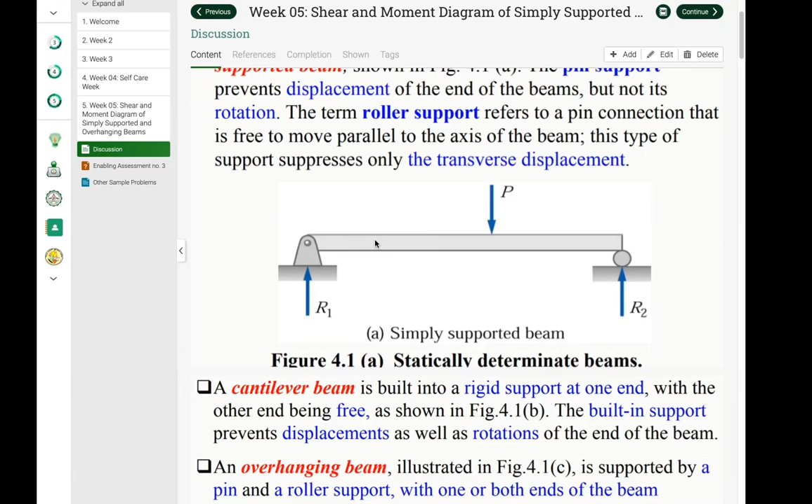The term beam refers to a slender bar that carries transverse loading, meaning the applied forces are perpendicular to the bar. For example, we have a beam that carries a transverse load, which could be a concentrated force or a uniformly distributed load. In a beam, the internal force system consists of a shear force and a bending moment acting on the cross section of the bar.

In mechanics of deformable bodies we discussed the bending stress, which is 6M over bh squared for a rectangular section. We also have the shear stress, do you still remember that from mechanics of deformable bodies? You still need to know this as we will encounter those stresses again. So we have the bending stress, which for a rectangular section is 6M over bh squared. And then for the transverse or horizontal shearing stress, that's tau equals 3V over 2A. Later we will have example problems on this.

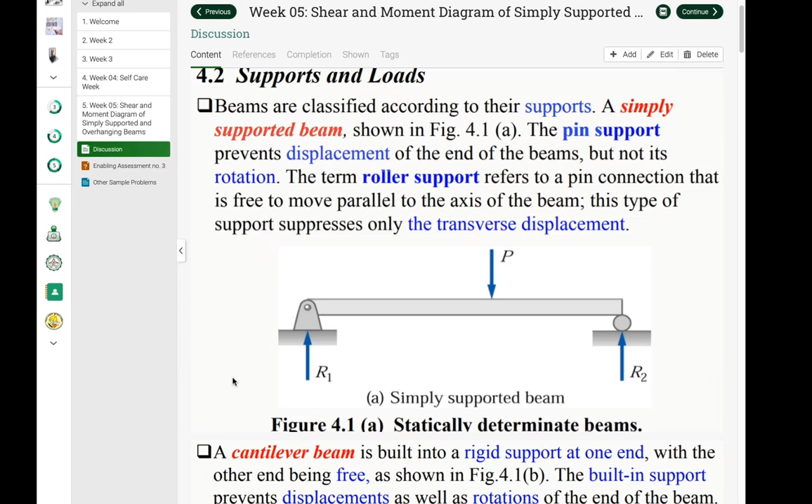Last week we discussed the typical supports and types of loadings we encounter in this subject. The first one is the simply supported beam, which we define as a statically determinate beam, because we could solve its reactions or forces just using equilibrium equations. We also have the cantilever beam and the overhanging beam.

There are three types of beams that are statically determinate: the simply supported beam, the cantilever beam, and the overhanging beam.

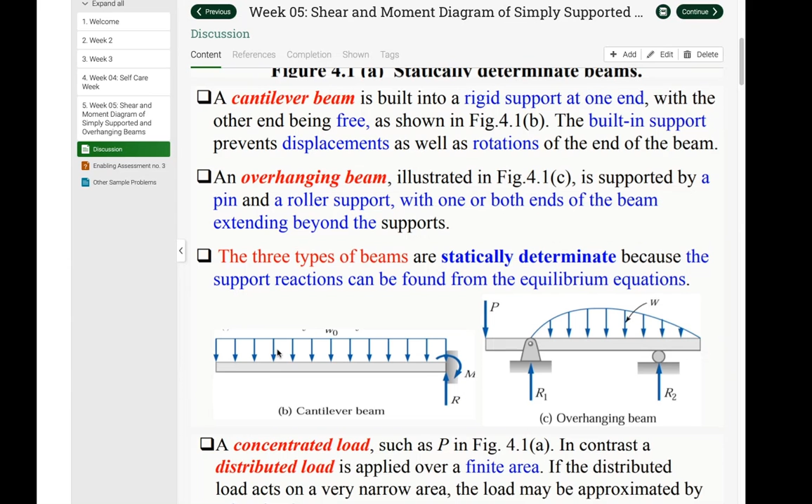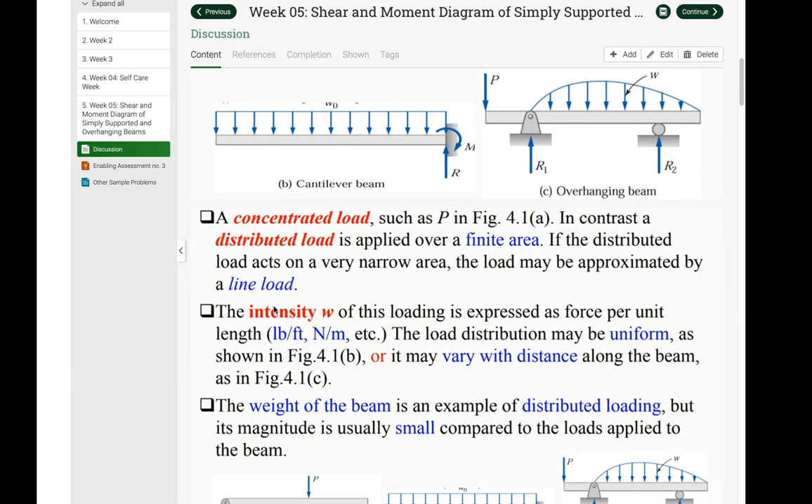We already defined what a concentrated load and a distributed load are. The unit of distributed load could be Newton per meter or kilonewton per meter, where the meter refers to the whole span of the distributed load. This is what we call the intensity W, which could also be pounds per feet, and it may vary with distance along the beam. We also have the weight of the beam, so take note, if the weight of the beam is given, we have to compute it separately, it's not yet included with the distributed loads.

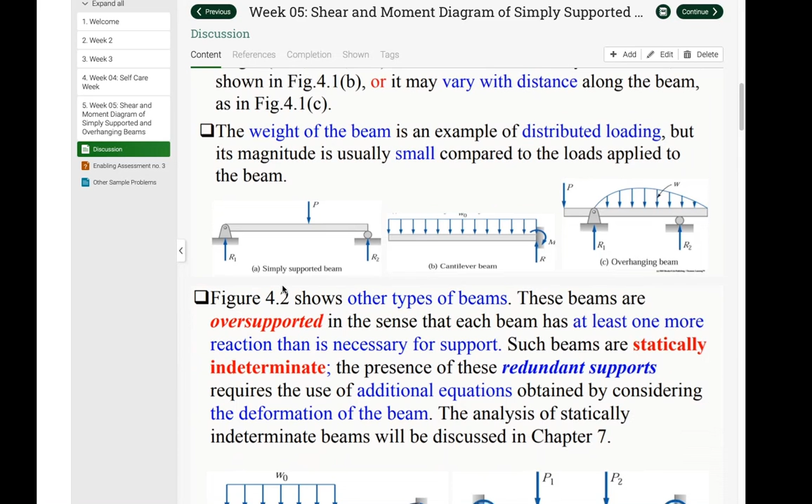We also have the statically indeterminate beams. Usually we define a fixed end and a roller support at the other end as statically indeterminate. And when both ends are fixed, we define it as statically indeterminate as well, such as the propped cantilever beam and the fixed or restrained beam.

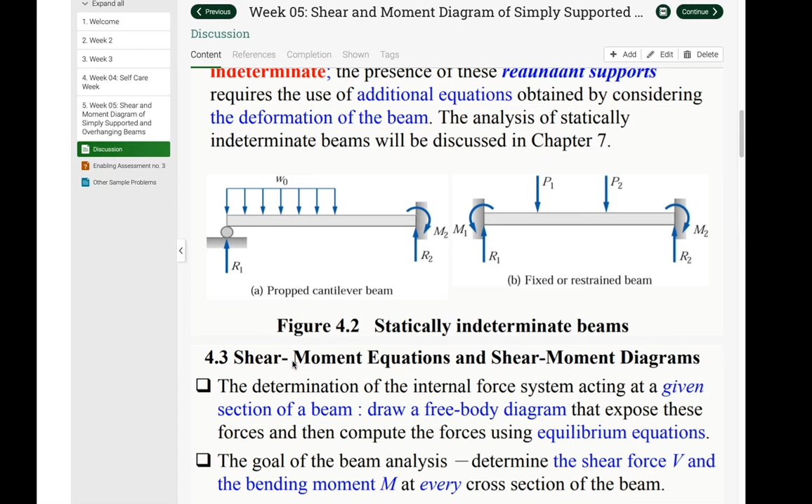In shear and moment equations and shear moment diagrams, we determine the internal force system acting at a given section of a beam, identifying forces like shear and moment. The goal of beam analysis is to determine the shear force and bending moment at every cross-section of the beam. For example, at a certain distance we need to determine the shear force and bending moment, so we should first draw the shear and moment diagram to more quickly get these values.

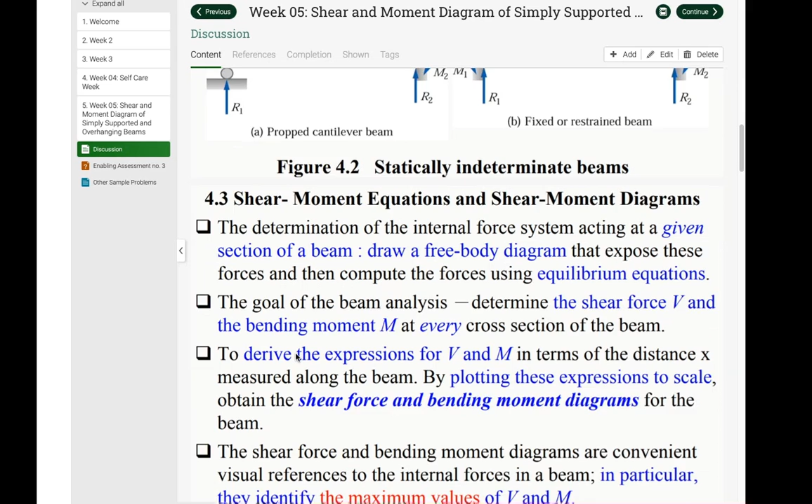We derive the expression for shear and moment in terms of the distance x measured along the beam, then by plotting these expressions to scale, we obtain the shear and moment diagrams for the beam. Later we will have sample problems about shear and moment. The shear force and bending moment diagrams are convenient visual references to the internal forces in a beam, allowing us to identify the maximum values of shear and moment.

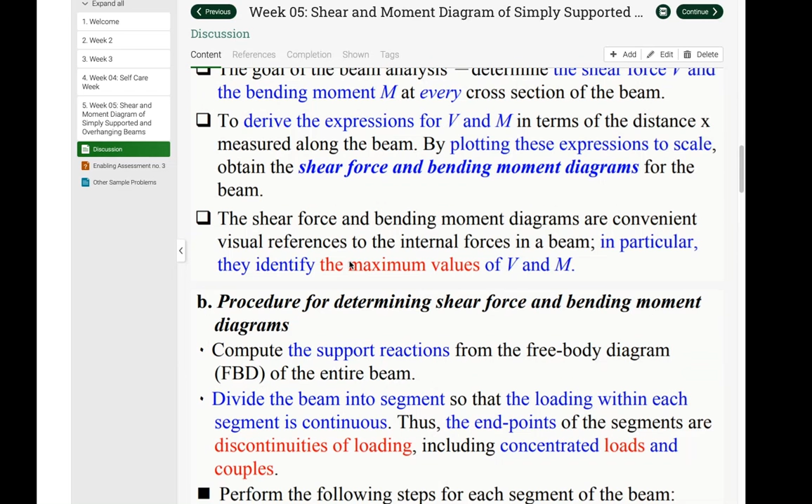Here's the procedure for determining the shear force and bending moment diagrams. First, compute the support reactions from the free body diagram. So basically class, let's start by computing the support reactions. Since it's simply supported, we need to compute the leftmost and rightmost reactions. Then we divide the beam into segments so that the loading within each segment is continuous, with endpoints at points of discontinuous loading, including concentrated loads and couples.

Then perform the following steps for each segment of the beam. Introduce an imaginary cutting plane within the segment, located at distance x from the left end of the beam, that cuts the beam into two parts. So once we cut the section, we separate the left and right sections of our beam. Then we draw our free body diagram for that part of the beam, where we analyze the directions of our shear and moment.

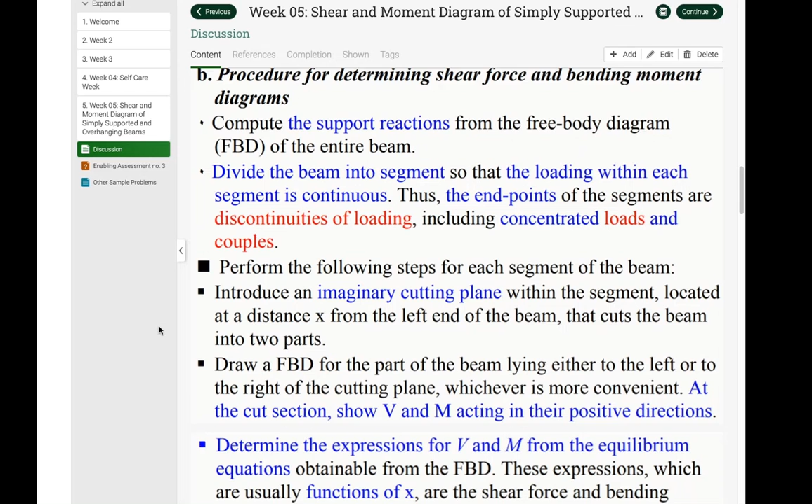At this cut section, show V and M, shear and moment, acting in their positive directions. Class, once we compute the shear and the result is negative, it means we made wrong assumptions. Same with our moments. Then we determine the expressions for shear and moment from the equilibrium equations obtained from the free body diagram. These expressions, which are usually a function of x, are the shear force and bending moment equations.

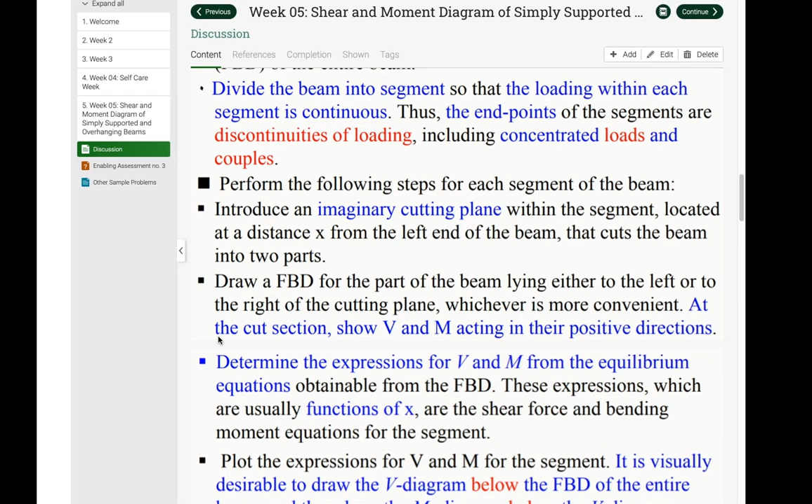Then we plot the expressions for V and M for the segment. We identify our shear diagram from the loadings on the beam. Then we convert our shear diagram into the moment diagram. The bending moment and shear force diagrams of the beam are composites of the V and M diagrams of the segments, so these diagrams are usually discontinuous or have discontinuous slopes at the endpoints of the segments due to discontinuities in load.

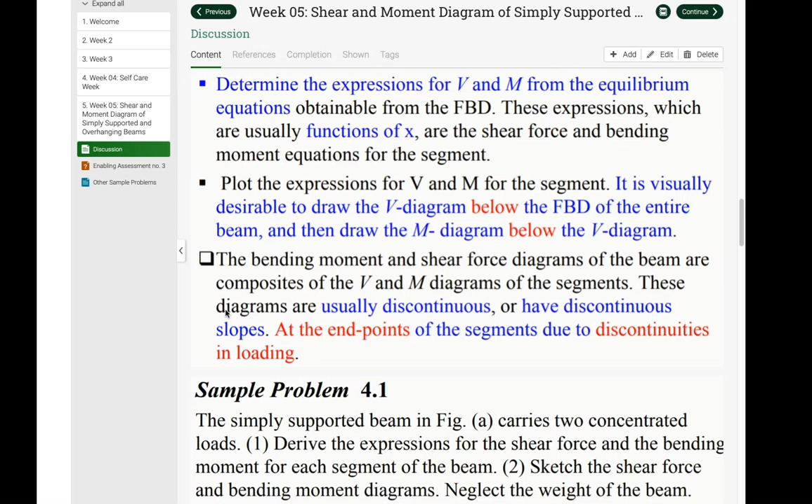So now we'll have an example, sample problem 4.1. We have here a simply supported beam. Can you see this figure? Let's analyze the figure first.

We have a reaction at A and a reaction at B, then we have segments A, B, C, and D. We also have given two concentrated loads in the downward direction, 14 kilonewtons and 28 kilonewtons, with distances of 2 meters, 3 meters, and 2 meters. Let's read our given information first.

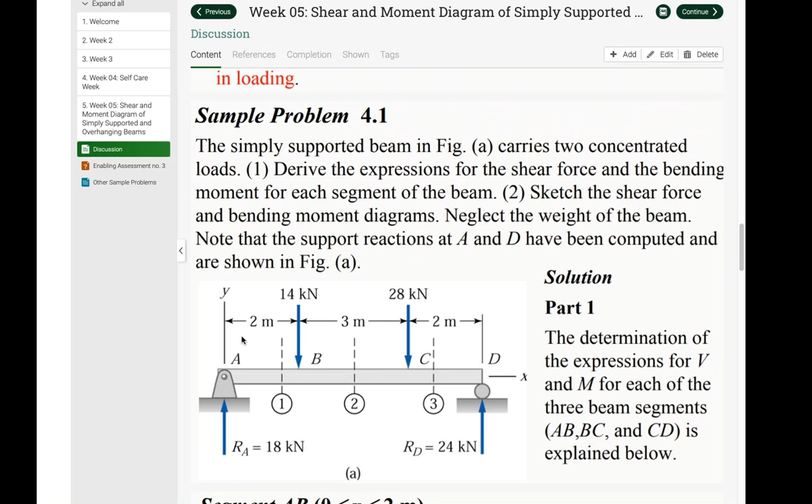Okay, so let's start with sample problem 4.1. The simply supported beam in the figure carries two concentrated loads. First, we derive the expression for the shear force and bending moment for each segment of the beam. Then we sketch the shear force and bending moment diagrams. Note that we're going to neglect the weight of the beam, meaning we're not going to include it.

Sometimes the weight of beams is given in kilograms or pounds, but here since we're told to neglect the weight of the beam, note that the support reactions at A and D have already been computed and are shown in the figure, so we don't need to compute them ourselves. So, solution part 1: the determination of the expressions for V and M for each of the three beam segments. We have segments AB, BC, and CD.

So for segment AB, we determine that 0 is less than x is less than 2 meters. We identify that our x is denoted along the middle of that 2 meter span. So how do we solve for our shear force? By using the summation of forces in y equals 0, where upward is positive and downward is negative.

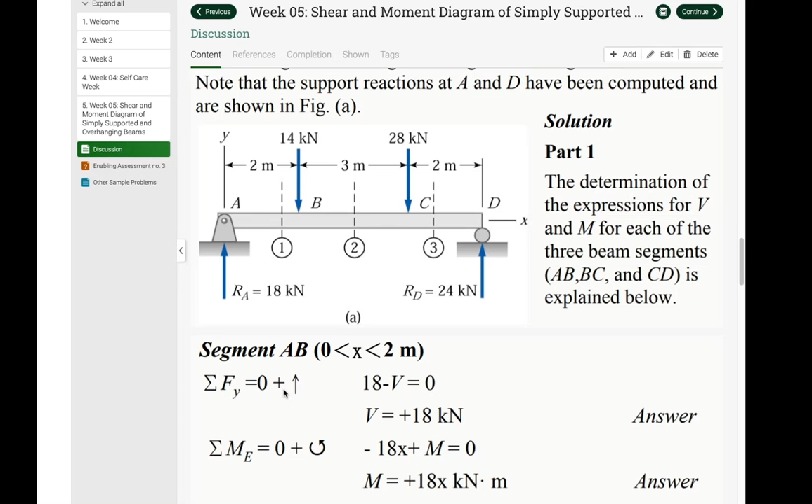Let's look first at the free body diagram we're going to make. For example, let's cut a section in segment AB at a particular x from A to B, so this is our x. Then we're given the reaction force at A, which is 18 kilonewtons upward. So we're going to determine the shear at segment AB.

So we could easily identify our shear direction, which is downward class. So it could remain in equilibrium, no? Kasi meron tayong upward na 18 kilonewton. So by summation of forces, y is equal to 0, we have 18 upward minus our V is equal to 0. That's why we have a shear force of V equals positive 18 kilonewton for this segment E.

Then, of course, syempre, once we cut a section in a beam, kapag hindi naman siya given na pin connected or hinge connected, automatically class magkakaroon ka ng three reactions. But since dito class is simply supported naman siya, at lahat ng mga loads o forces natin is upward and downward lang, wala tayong horizontal forces, then we neglect na yung ating horizontal force kasi mag-equal to 0.

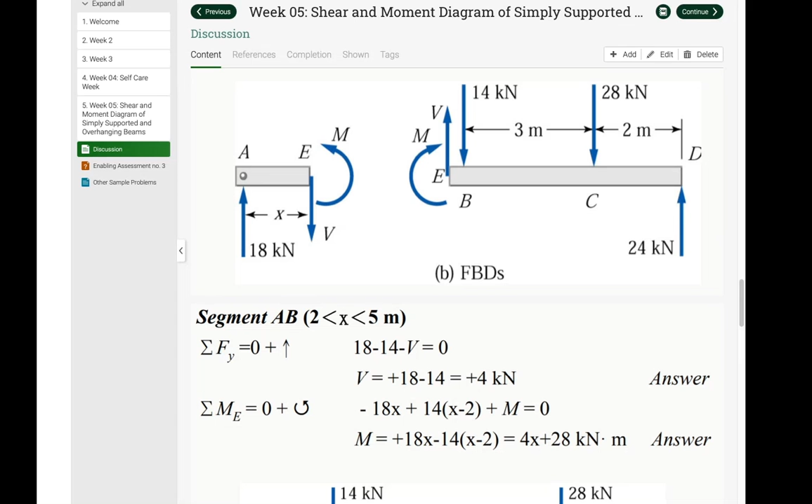Ayan, so nasundan class? So we will now proceed sa next na segment natin, which is segment BC, which is 2 meters is less than X and less than 5 meters, yung gitnang part.

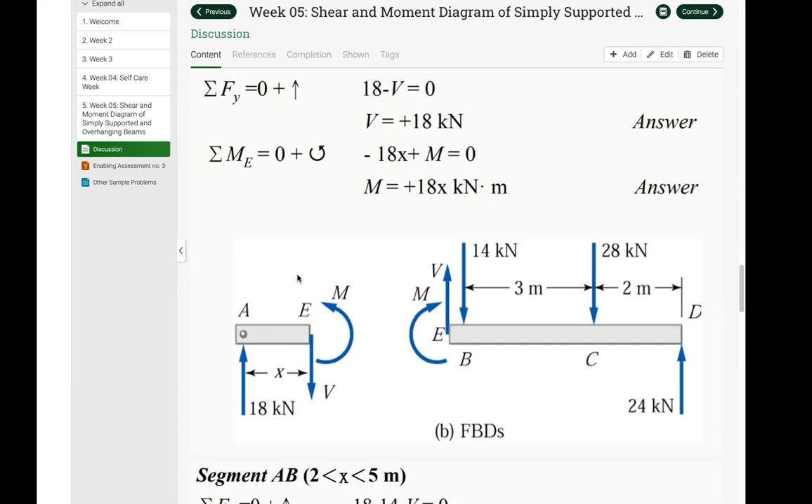So from our free body diagram, plus... ayun, ito. So ito yung ating X, and then ito yung ating 2 meters. That's why we have X minus 2. So ito yung hinahanap natin, X minus...

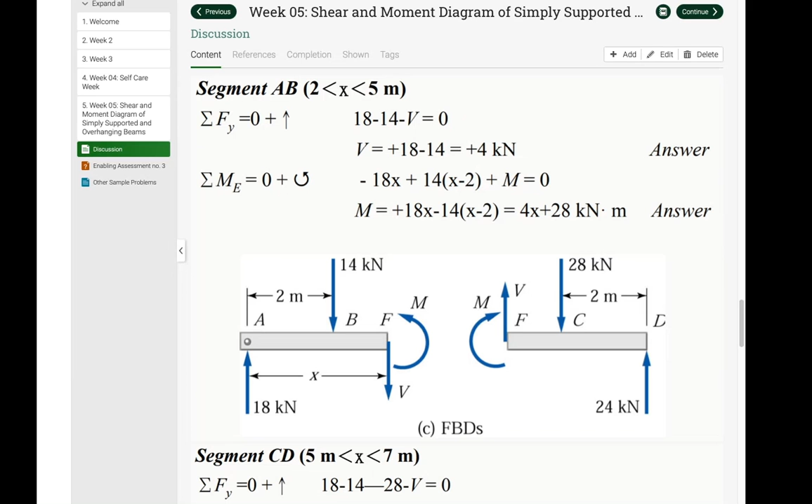Okay, so let's proceed now to the segment BC. We're going to analyze segment BC, which is 5 meters is less than X is less than 7 meters.

So we're going to use summation of forces, Y is equal to 0. So we have 18 minus 14 minus 28 minus V is equals to 0. So ang ating V sa left side portion is negative 24 kilonewton.

So it means parang sinasabi dito na wrong tayo ng assumption ng ating shear dahil naging negative. But don't worry class, kaya natin ina-identify din yung shear natin sa moment sa both section para maging equilibrium yung ating beam.

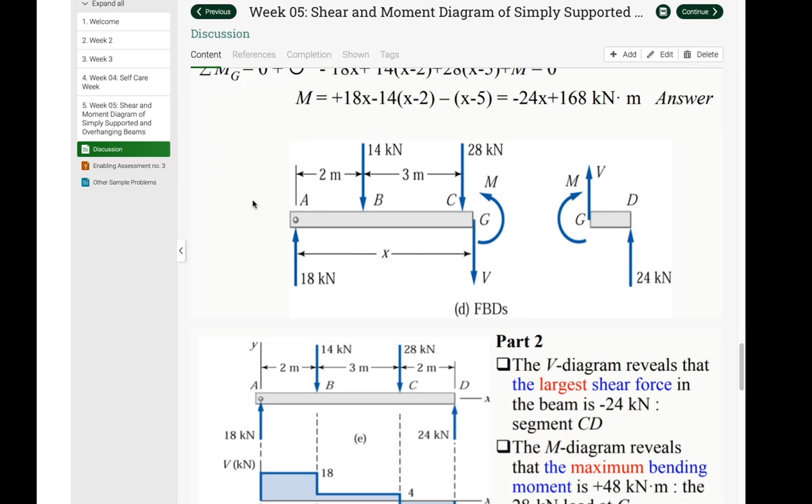And then for our second part, we're going to determine yung ating mga maximum shear force and maximum moment ng ating diagram.

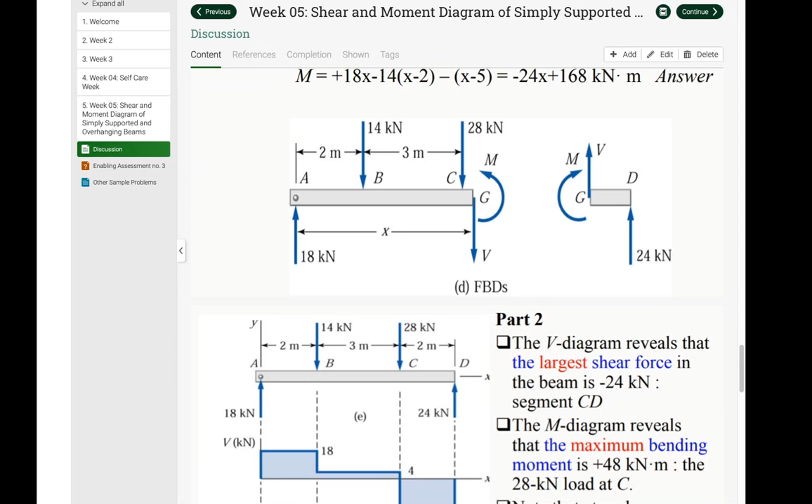Okay, so this is our figure. So anong una natin gagawin, class?

Okay, so the V diagram reveals that the largest shear force in the beam is negative 24 kilonewton. So how do we analyze the V diagram? First, magsisimula tayo syempre from left to right, ma-determine natin ang ating shear diagram dun sa ating mga loadings.

So we have here a concentrated load na pataas na 18 kilonewton. So that's why we have 18 kilonewton. Can you type it on your calculator? And then magre-retain lang yung 18 kilonewton.

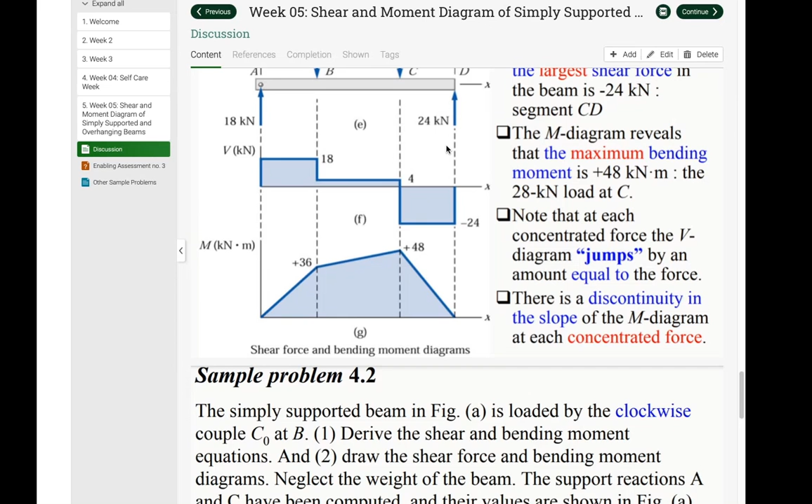So there is discontinuity in the slope of the moment diagram at each concentrated force. Note that at each concentrated force, the V diagram jumps by an amount equal to the force. So next problem natin, sample problem 4.2. Can you read this one first?

So the simply supported beam in figure A is loaded by the clockwise couple. So we have here a couple at B. And then we're going to derive the shear and bending moment equations, and then we're going to draw the shear force and bending moment diagram. So again class, we're going to neglect the weight of the beam natin.

And then the support reactions A and C have been computed. Their values are shown in the figure.

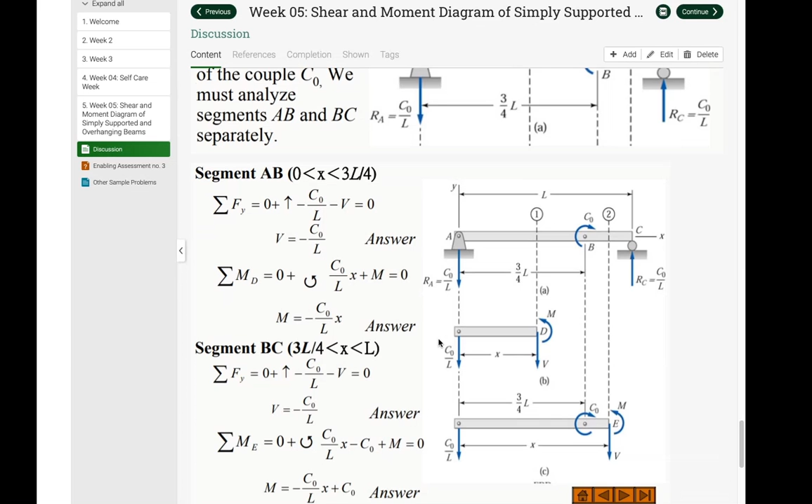Next is our segment BC. So from 3L over 4, at point B, going to point C, at the middle, that's our X. So from our figure, our X is from point A to the segment BC.

By summation of forces, y is equal to 0, we have negative C0 over L, and then negative V is equal to 0, minus V equals 0. That's why we have V equal to negative C0 over L.

And by summation of moment at point E, equal to 0, we have C0 over L times X minus C0 plus M equals 0. Then our M is equal to negative C0 over L times X plus C0. That's our expression for segment BC.

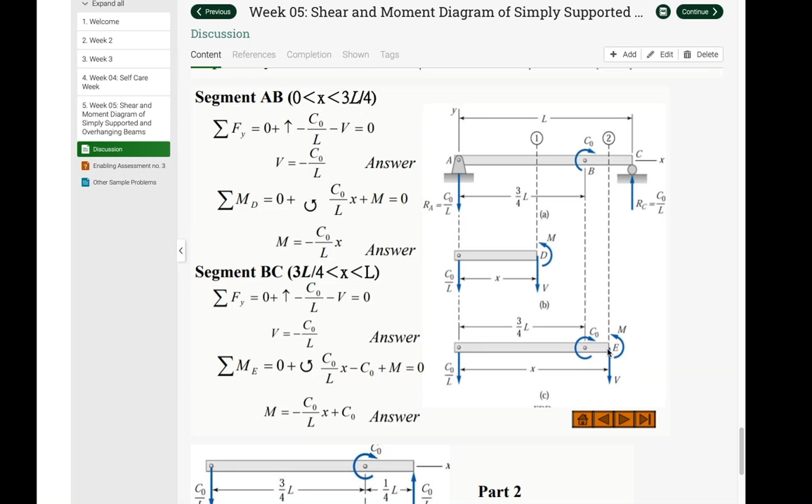Then for our second part, we're going to draw our shear and moment diagram to determine the maximum shear and moment.

Okay, so for part 2, from the V diagram, can you read? From the V diagram, the shear force is the same for all cross-sections of the beam.

The M diagram shows a jump of magnitude C0 at the point of application of the couple. So first, we have a downward C0 over L. Even if we don't know the value, we know there is a downward shear. Since we have no other concentrated loads or uniformly distributed loads, we go straight to the end, and then we add our reaction, which is C0 over L, so it becomes equal to 0. Our shear becomes 0.

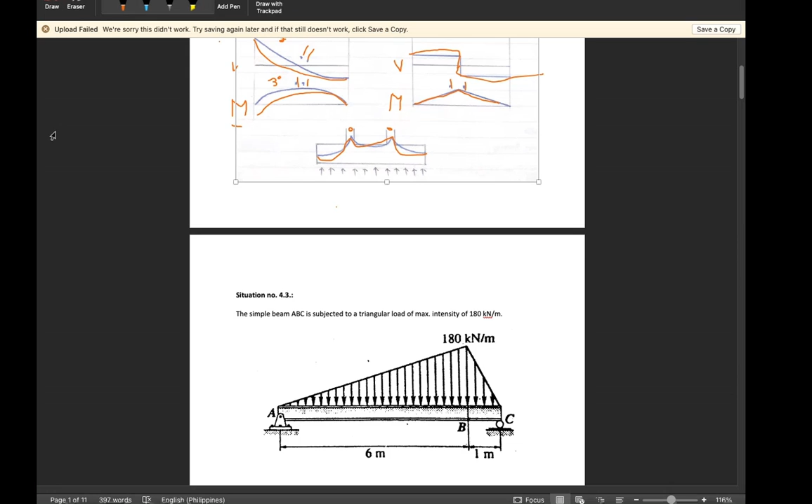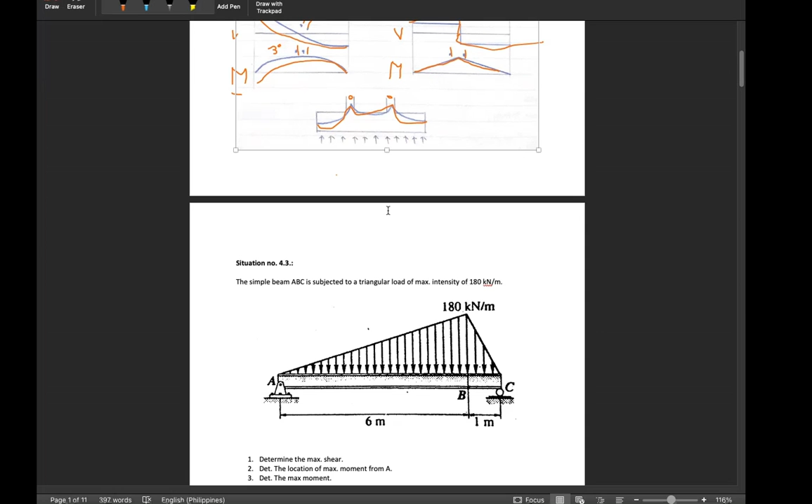The simple beam ABC is subjected to a triangular load of max intensity of 180 kilonewton per meter, from point A to C. We're going to determine the max shear, the location of maximum moment, and the maximum moment itself. For our solution, let's first solve the triangular loads.

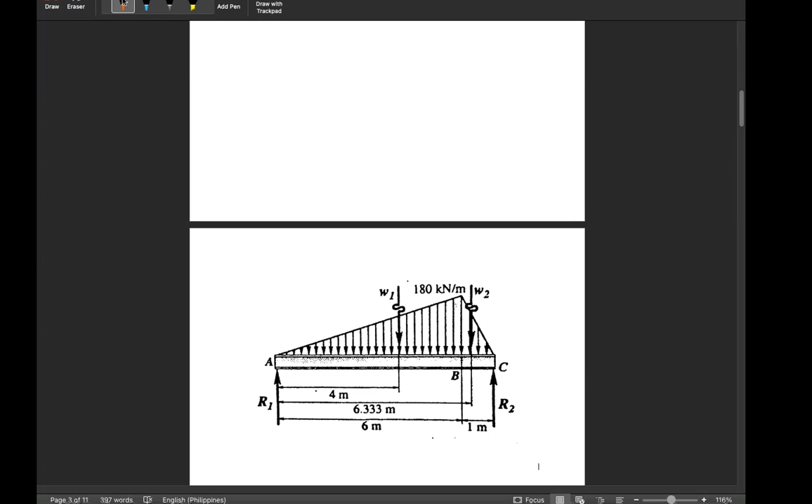And then we already defined the distances. So class, when we take the moment of non-uniform or triangular loads, we need to first determine the centroids, and then the value of our W1 here, and then our value.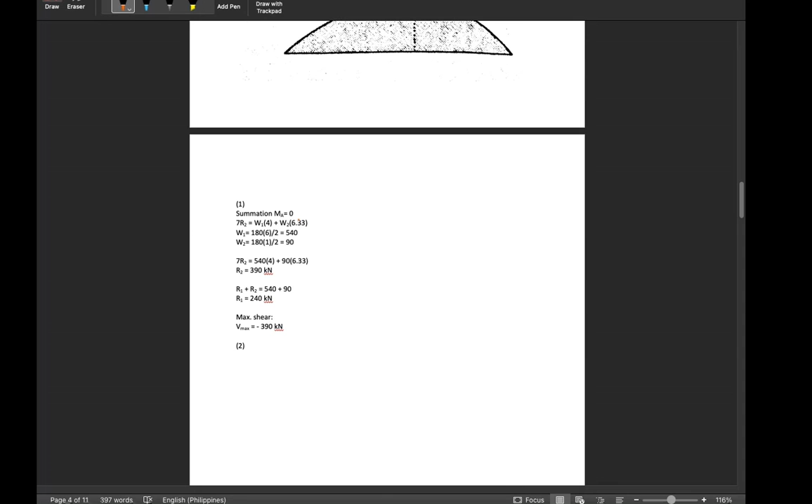So we know that we are given 180 kilonewton per meter. So first we have to identify our R1 and R2. By summation of moment at A equals 0, we get R2 times 7 equals W1 times 4 plus W2 times 6.33.

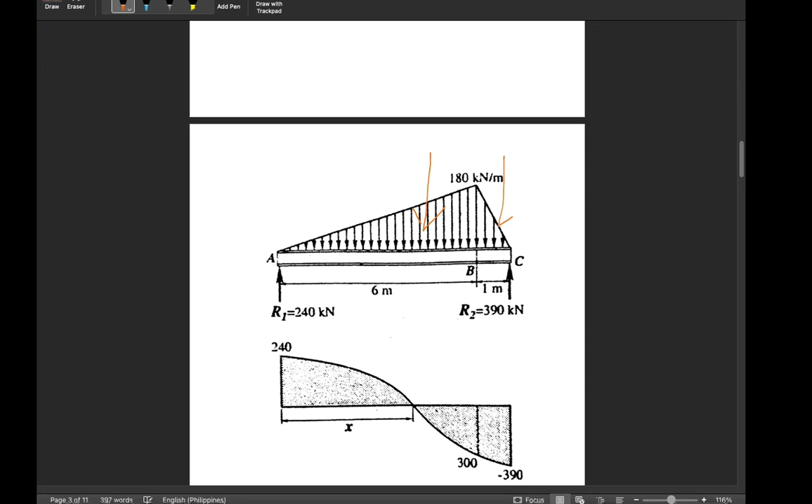So from point A, we have W1, then W2. So we already know the distances. So how did we get this 4?

Remember class, when it's at the toe of our triangle, that's 2/3 of our span. So let's compute that: 2 over 3 times our L. The span of our first triangular lower load is 6 meters, so we get 4.

Then for the other one, to get 6.33 - that's the hill we're analyzing. When we analyze from point B to the center of our triangular load, that's 1/3 of our L. So 1/3 times L is 1/3, plus 6. That's why we have 6.333 meters.

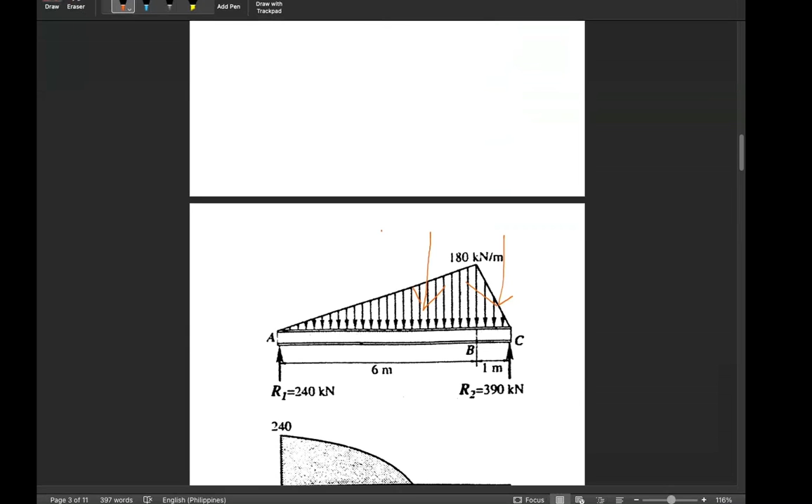So now we have the distances, we could now compute for our value W1. We got W1 given as 180 times 6 span over 2. Since it's a triangular load, we have 540 kilonewton and 90 kilonewton.

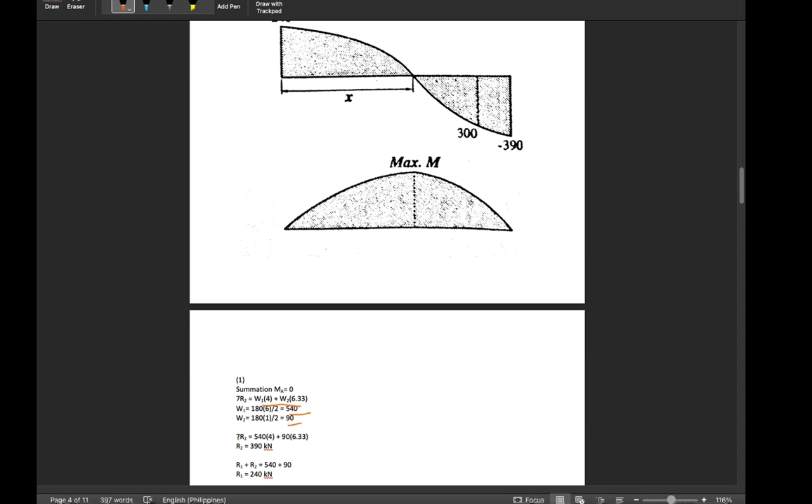So that's how we got 540 and 90. Then by summation of moment at A, we have R2 times its distance 7 equals 540 times 4 plus 90 times 6.33. Then we get R2 equals 390 kilonewton.

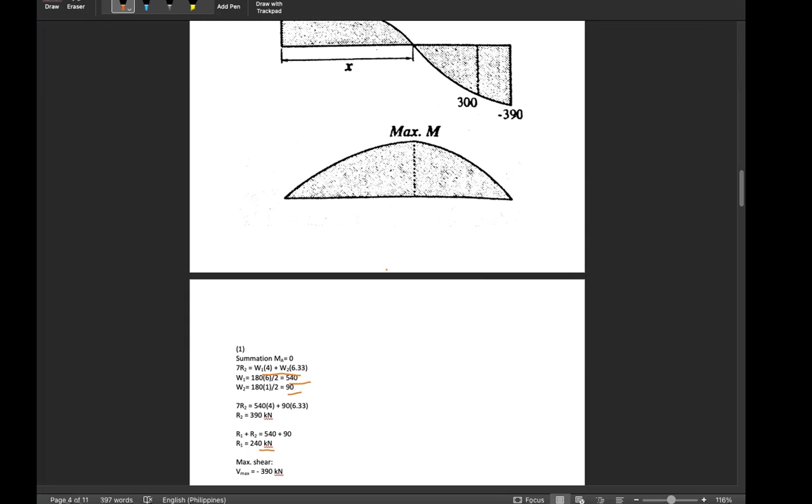So from our figure, we could determine the maximum and highest point of our moment. Since it's a triangular load, let's compute the area of the triangular load: 1/2 times 6 times 180. Let's start at 240, then minus 1/2 times 6 times 180, we get negative 300.

So at a certain point, our shear becomes zero. Since this is going up class, again, when we go up in level, that's like the time we become sad. So we have this figure, and we have a curve going down.

So from negative 300, we also subtract the area of our next triangular load, which is 1/2 times 180 times 1, giving us negative 390, plus our reaction force of 390 equals 0.

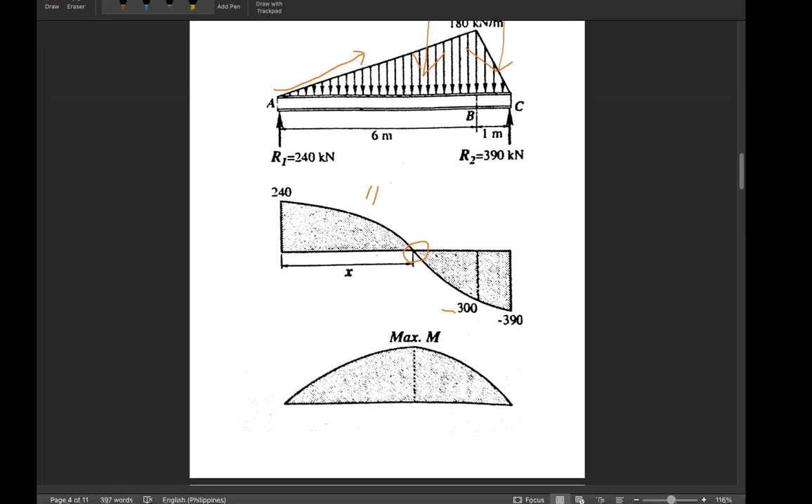Or is it disconnecting? Then for the moment diagram, okay, so our maximum shear is negative 390.

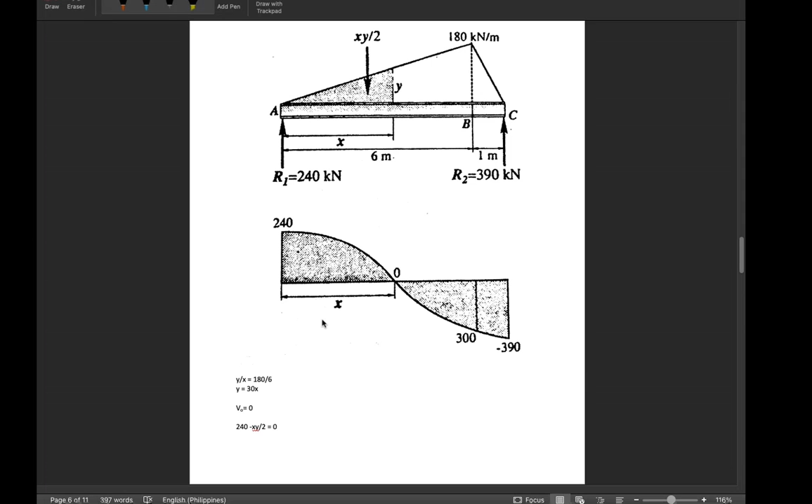So using our equation for the parabola class - do you remember that, class? The equation of our parabola - that's y over x.

So the next thing we need to get is our x value from point A to the point where our shear becomes zero. Okay, so we need to compute that.

So using our equation for the parabola, y over x equals 180 over 6. So y over x - here it is class, this is our x, this is our y.

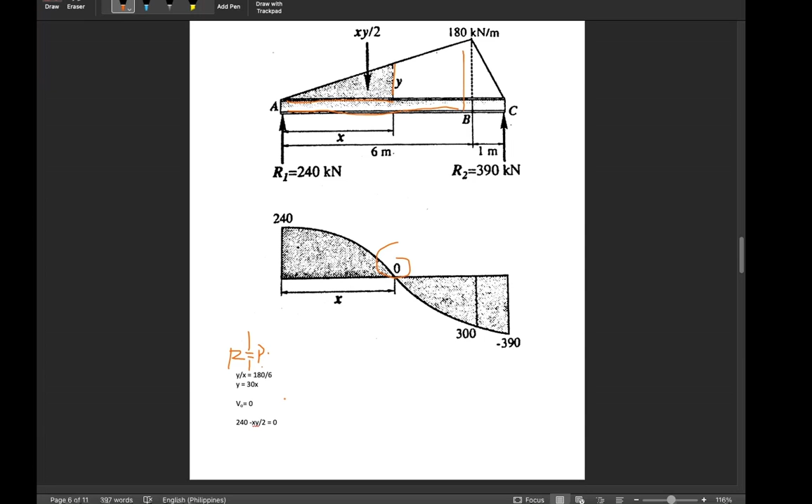So 240 minus x times y over 2 equals 0. So 240 minus x times y over 2 equals 30x over 2 equals 0. So our x equals 4 meters from A.

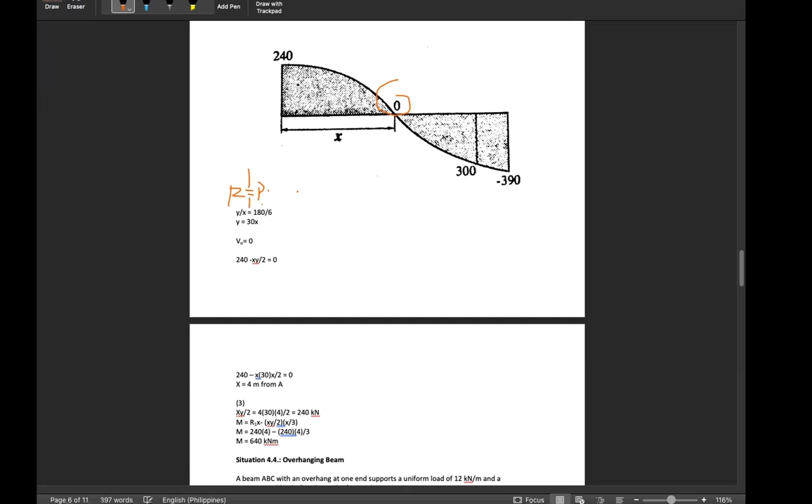And then next, we're going to compute the maximum moment, I mean the moment at 4 meters from A.

So what is our maximum moment? We have x times y over 2 equals 4 times 30 times 4 over 2 equals 240.

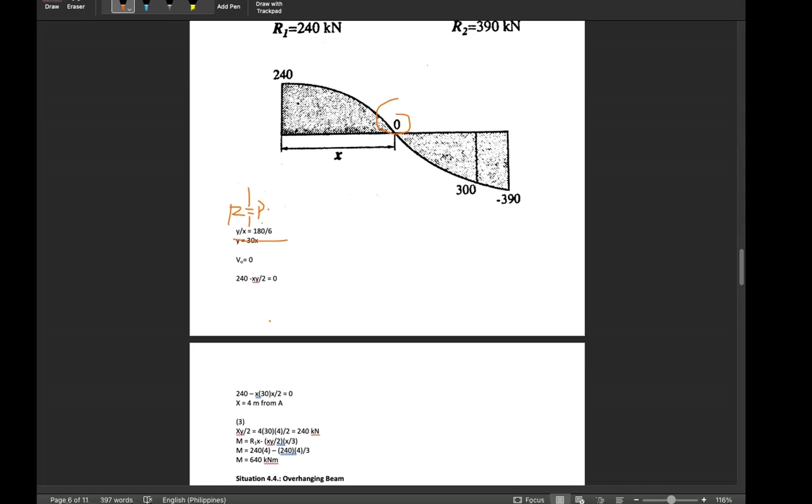So, from ratio and proportion pa rin siya. So m natin is equals to r1x minus xy over 2 times x over 3. So m is equals to 240 times x. Yung x natin is equals to 4, minus 240 times 4 over 3. That's why ang ating moment is 640 kilonewton meter.

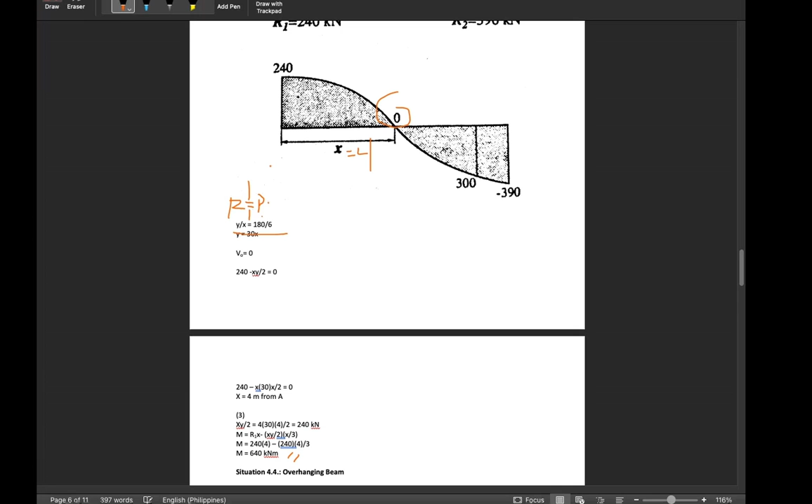Yan, so nag-gets ba yan, class? So nag-ratio and proportion tayo, class, na y over x. So ating y over x natin is equals to 180 over 6. Kaya nakuha natin yung y is equals to 30x natin. And then, shear is equals to 0.

From shear equals to 0, we have 240 minus xy over 2 is equals to 0. And then 240 minus x times 30x over 2 is equals to 0. Kaya meron tayong x is equals to 4 meters from A.

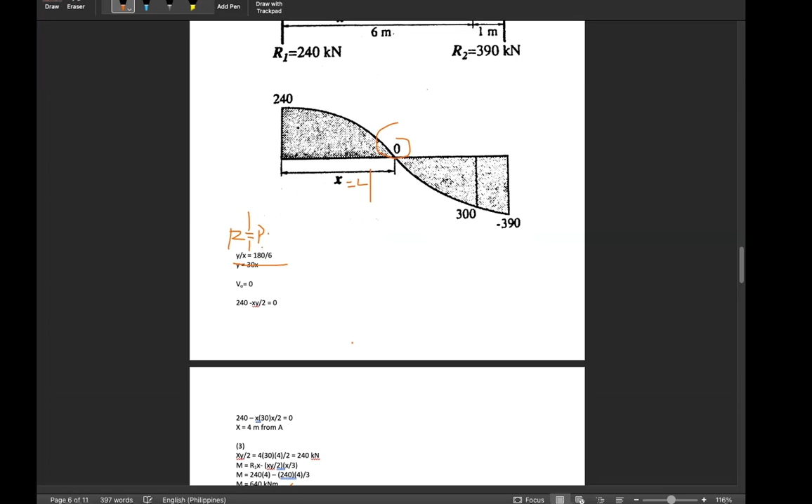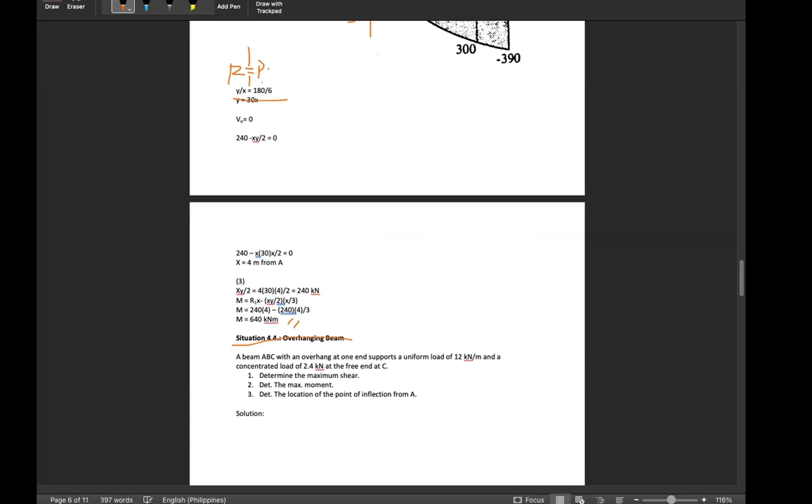The next situation, number 4.4, overhanging beam natin. So let's read the problem. So a beam ABC. So can you read this one?

Okay, so we're going to determine the maximum shear, the maximum moment, and the location of the point of inflection from point A. So solution natin, so this is our figure. Meron tayong R1, R2, and a concentrated load, and meron tayong uniform distributed load.

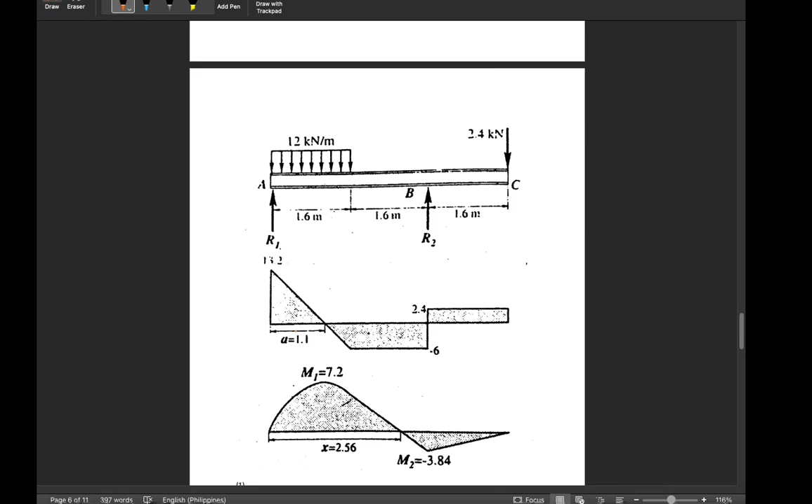Yeah, so let's compute first our R1 and R2. So we have 3.2 R1 by summation of moment at B is equal to 0. So 3.2 R1 plus 2.4 times 1.6 equals to 12 times 1.6 times 2.4. Then meron tayong R1 na 13.2. And then let's solve for our R2 by summation of forces sa Y, which is R1 plus R2 is equals to 12 times 1.6 plus 2.4. We have R2 is equals to 8.4 kilo.

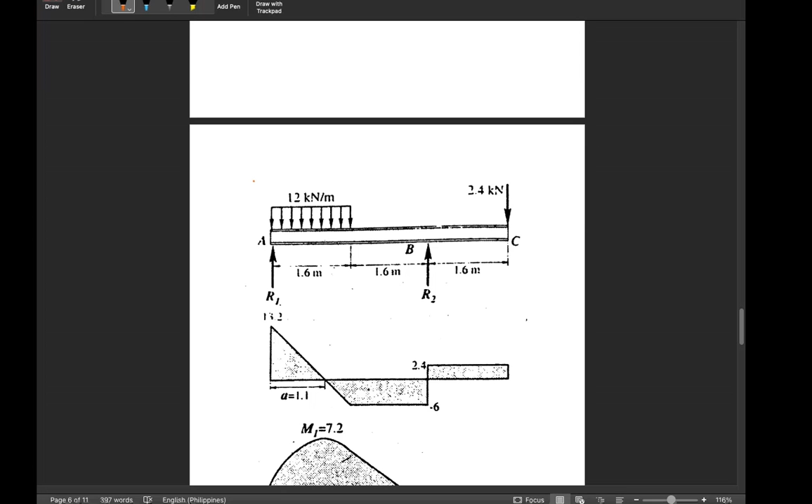Then we could now draw our shear and moment diagram. So this is our shear and moment. So start tayo sa R1 which is 13.2 plus area ng ating load is 12 times 1.6. So meron tayong 13.2 minus, pala plus, so minus 12 times 1.6. So we have negative 6. And then plus yung R2 natin, so anong R2 natin? 8.4. Meron tayong 2.4 minus 2.4 mag-equals to 0.

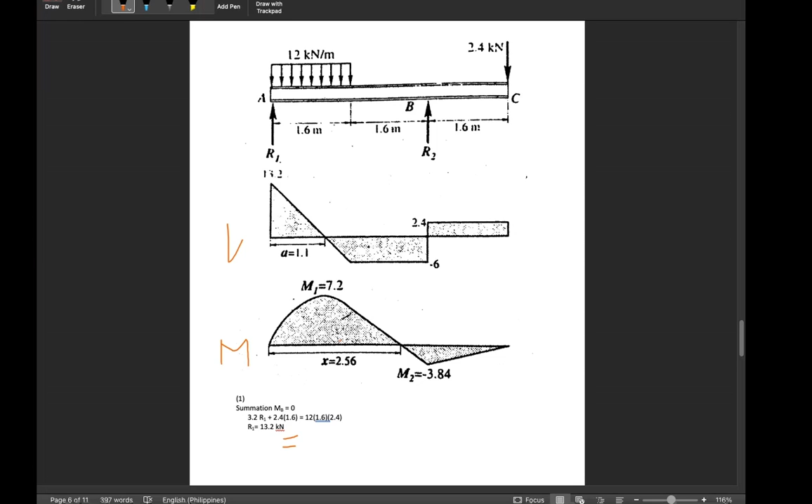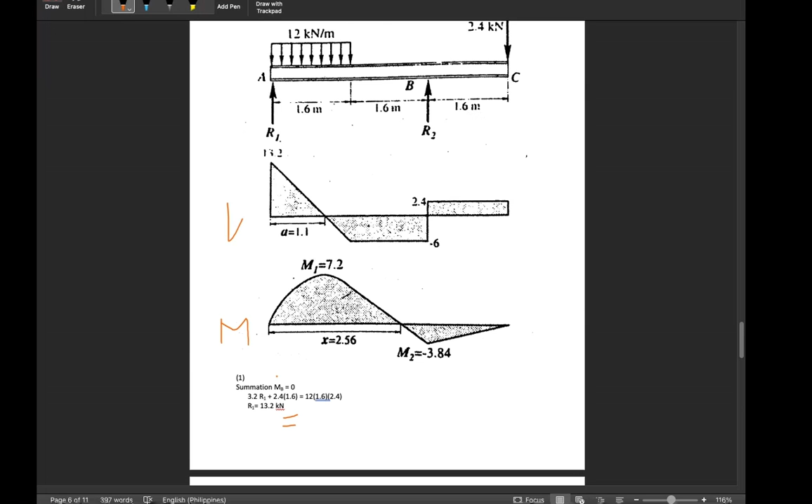Then for our moment, add lang natin yung ating area, which is 13.2 times 1. So paano nakuha yung A is equals to 1.1, class? So pwede natin gamitin yung ratio and proportion. So 12A is equals to 13.2. That's why ang ating A dito is 1.1. So identify na natin yung A is equals to 1.1.

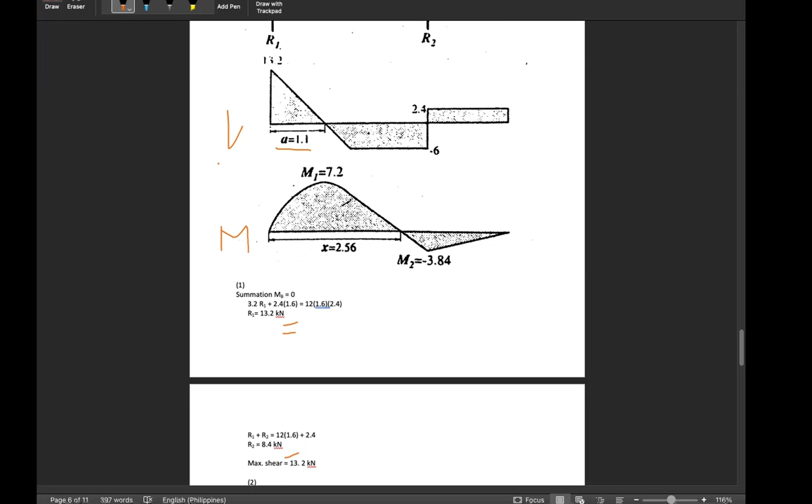Oops, ay doon lang pala class, dito lang. 1.6, so this 1.6, 1.6 times 13.2 divided by 19.2. It's 1. So, gets class.

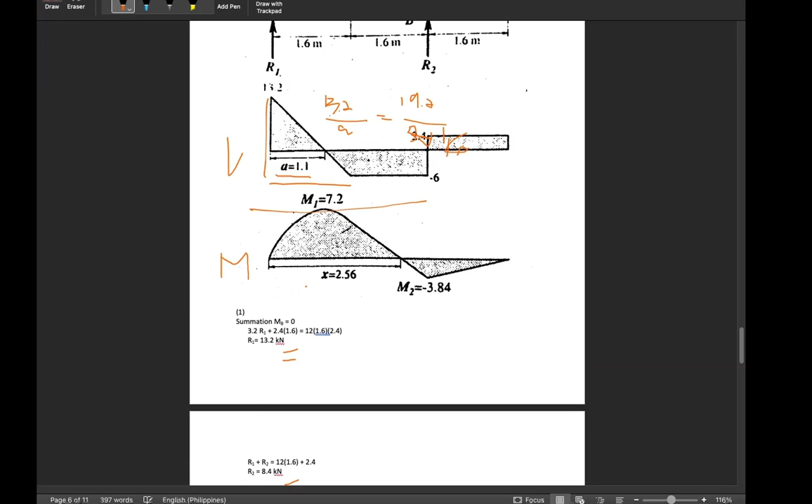So compute natin yung ito naman, itong figure naman na M2 is equals to negative 3.84. So we have 7.26, so 7.26 minus 2 times 0.5 times 2 minus 6 times 1.6. Yan, meron tayong, so 7.2 minus 2 over 0.5 times 2 minus 6 times 1.6.

Yan, so na-compute nyo ba, class? So 7.26 minus 2 times 0.5 times 2 minus 6 times 1.6. So that's 2.84. So this is 2 plus 2.84, yan, plus ha. So 2.84.

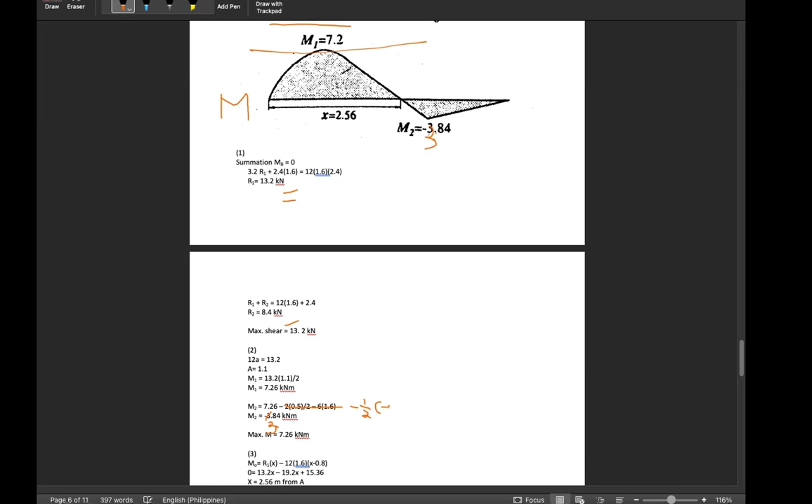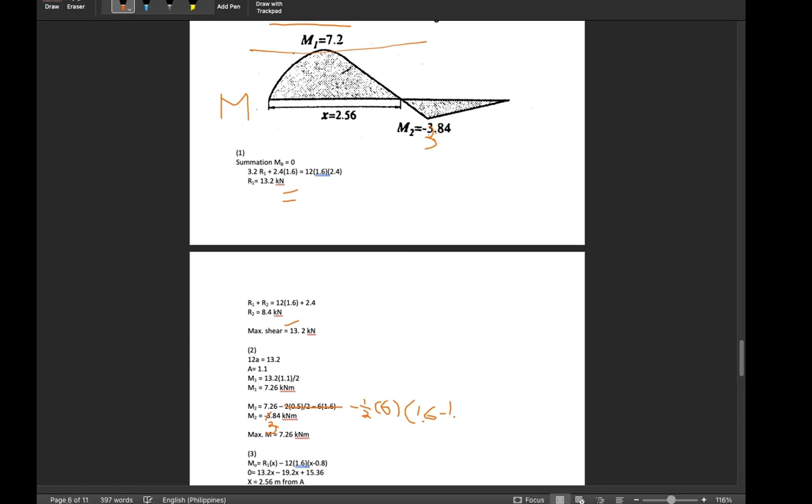So 1/2, this figure na nga natin, so minus 1/2 times negative 6, di ba, class? 6 na, so 6 times, kunin natin yung distance niya, which is 1.6 minus dun sa nakuha nating 1.1. So ito lang kasi yung kailangan natin, so that's our first shape. Tapos minus natin yung rectangular shape, negative 6 times 1.6. That's why we have negative 3.84 kilonewton.

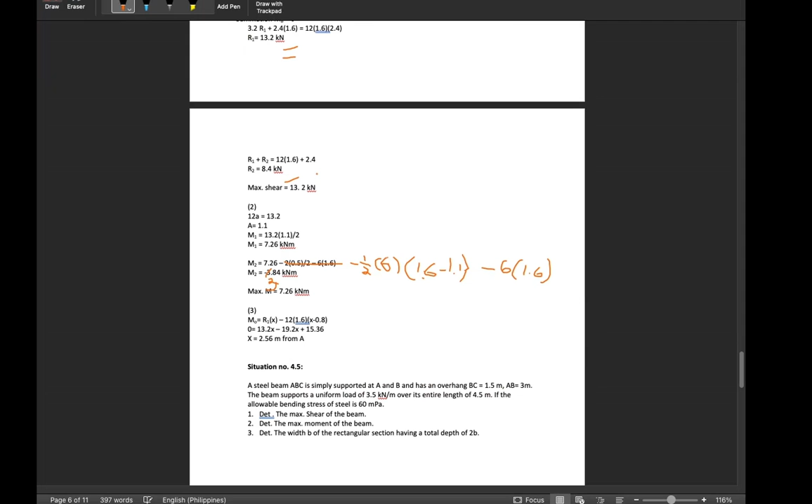As we could see, class, ang maximum moment natin is our 7.26 kilonewton. Then, sabi doon dito, what is our x, kung saan nag-zero yung ating moment?

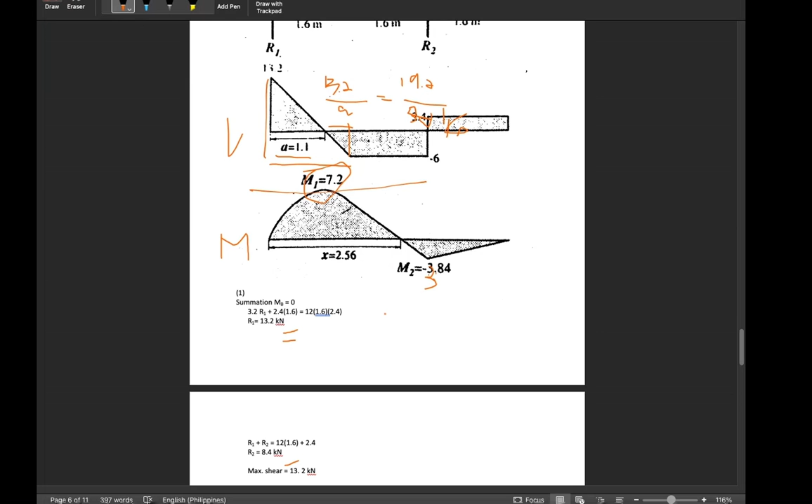So as you can see class, negative 3.84 plus our rectangular is 3.1. So 3.1 times our 1.6. From negative 6 plus our R2, R2 is 8.4, so 2.4 pala. So negative 3.84 plus 2.4 times 1.6 is equals to 0. Kaya nag-zero tayo sa moment.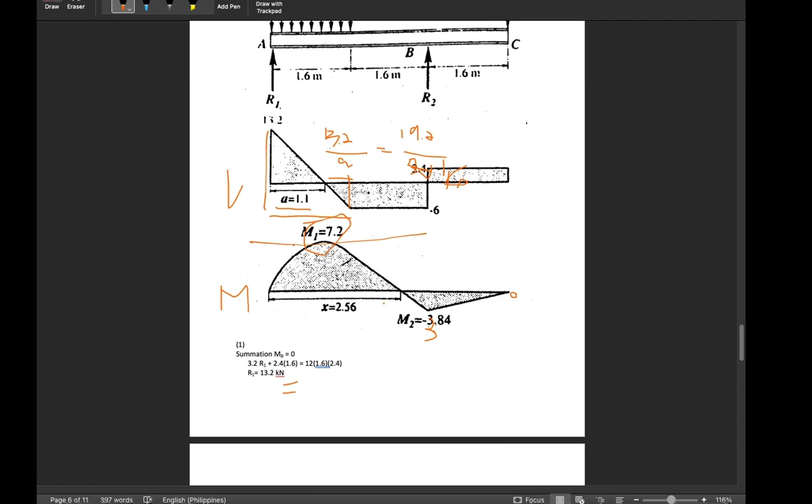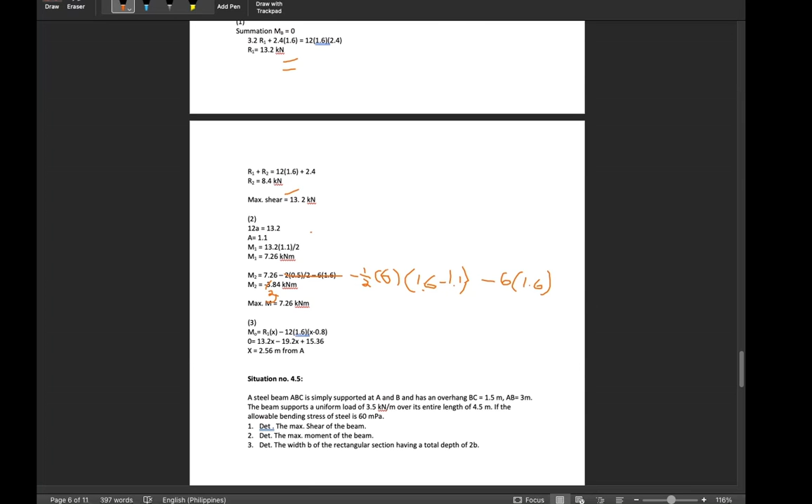So let's compute for our x. So saan nagkaroon ng x is equals to 2.56? From our summation of moment, 0, so R1 times x. Ito yung x natin, yung R1 natin. We define our x as x minus 12 times 1.6, plus yung W natin minus 12 times 1.6 times x minus 0.8.

So ang kailangan natin is yung gitna niya, ang gitna niya is 0.8, kaya naging x minus 0.8. So we already know what is our R1. Let's compute our x. So 13.2x minus 19.2x plus 15.36 is equals to 0. Then we could shift solve. So our x is 2.56 meters from our A.

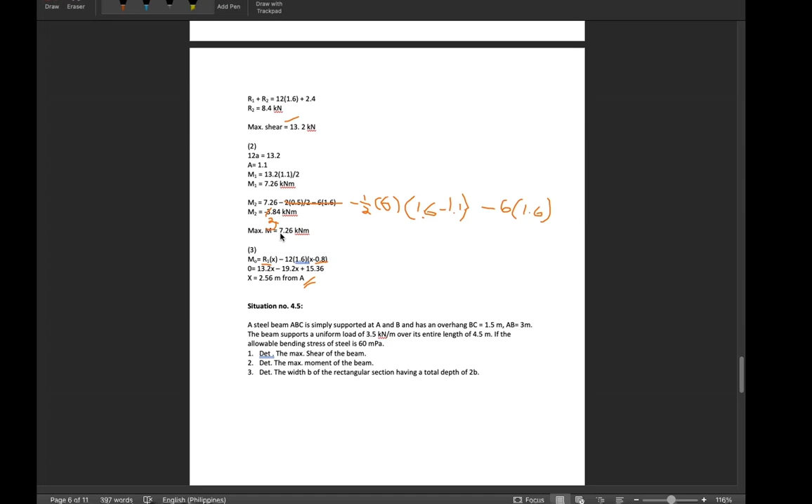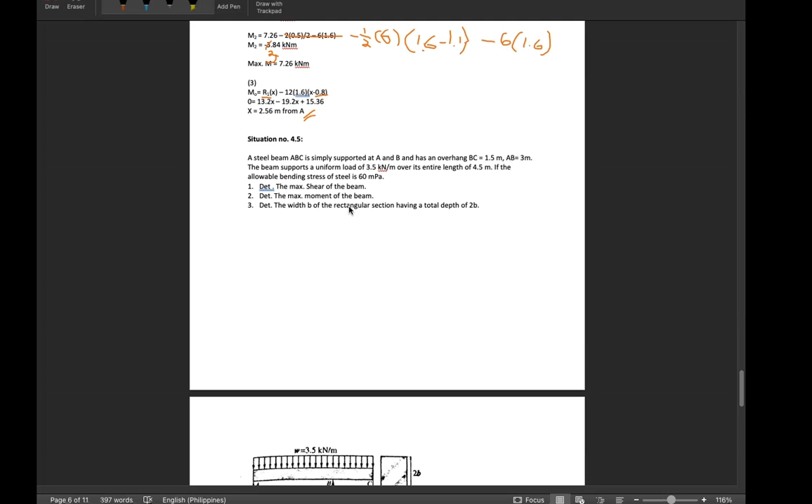So let's proceed now with situation number 4.5, which is a steel beam ABC simply supported at A and B and has an overhang BC. BC is equals to 1.5 meters. Nag-overhang na pala tayo, ayan, so this is our second situation na overhang. So the beam supports a uniform load of 3.5 kilonewton per meter over its entire length of 4.5. And meron tayong given na allowable bending stress of steel is 60 MPa. So we're going to determine the max shear of the beam, max moment of the beam, and the width of the beam of the rectangular section having a total depth of 2b.

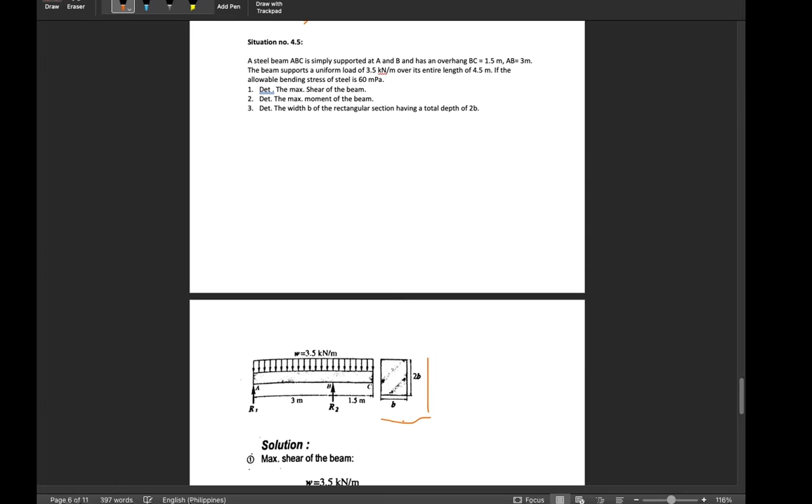So meron tayong given na allowable bending stress, then kailangan natin ma-determine yung required na base ng ating beam. So this is our figure, meron tayong reaction so R1 and R2. So we compute it first: the summation of moment at B is equals to 0.

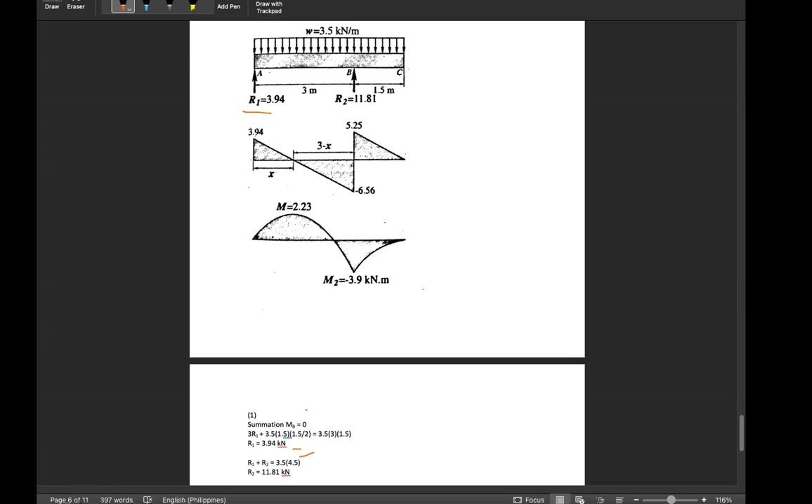3R1 plus 3.5 times 1.5 times 1.5 over 2, then we could arrive with 3.94 kilonewton, that's our R1. Then our R2: summation of forces sa Y is R1 plus R2 is equal to 3.5 times 4.5, that's why we have R2 is equal to 11.81 kilonewton.

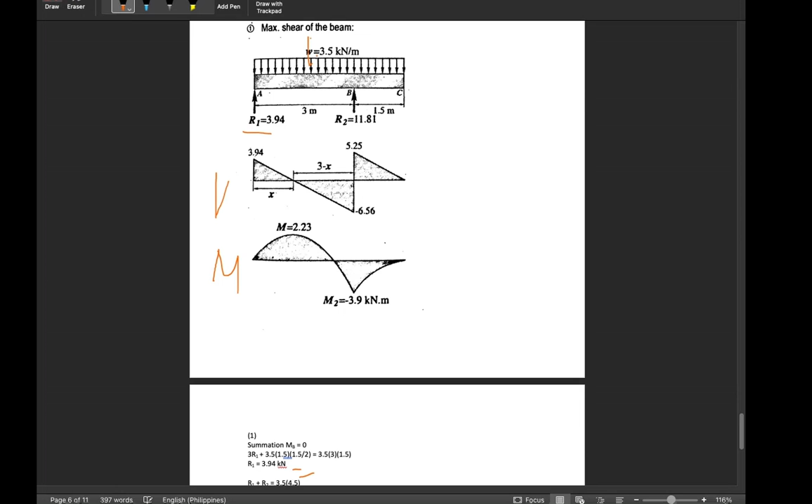Then let's draw our shear and moment diagram. So meron tayong R1 na 3.94 minus our 3.5 times, ano muna natin kung ano yung span, which is 3 times 3, okay. So kumpitin muna natin yung 3.5 kilonewton, that's 3.5 times 3.

Meron tayong 10.5. I think, ano pala, rectangular pala. So 3.94 minus 10.5, that's negative 6.56, and then plus 11.81, plus natin siya, kaya meron tayong 5.25 minus 3.5 ulit times 1.5, kaya magiging 0. Then let's compute yung ating...

So as we can see class, ang pinaka-highest point natin dito is yung ating negative 6.56 kilonewton. Then for the maximum moment, 1/2 times 3.94 times our x, so we have to determine the x. Pero pwede rin naman hindi na— ay hindi, kailangan ma-determine yung x. So by ratio and proportion, we could solve for our x, kaya ang ating x is 1.13.

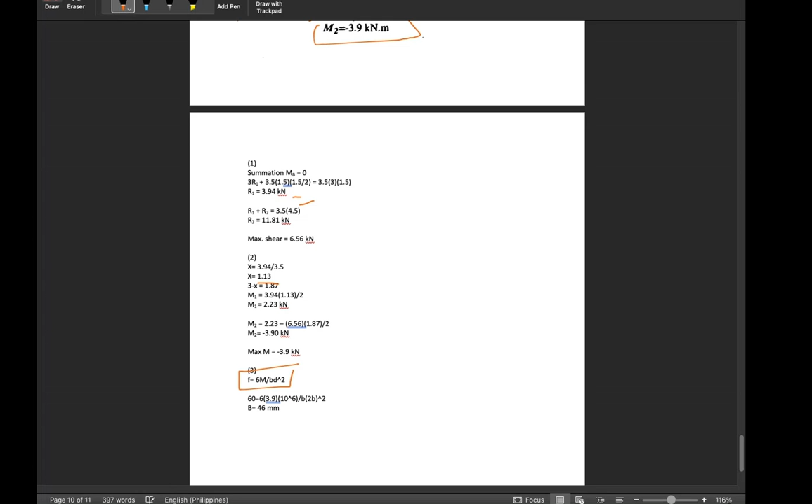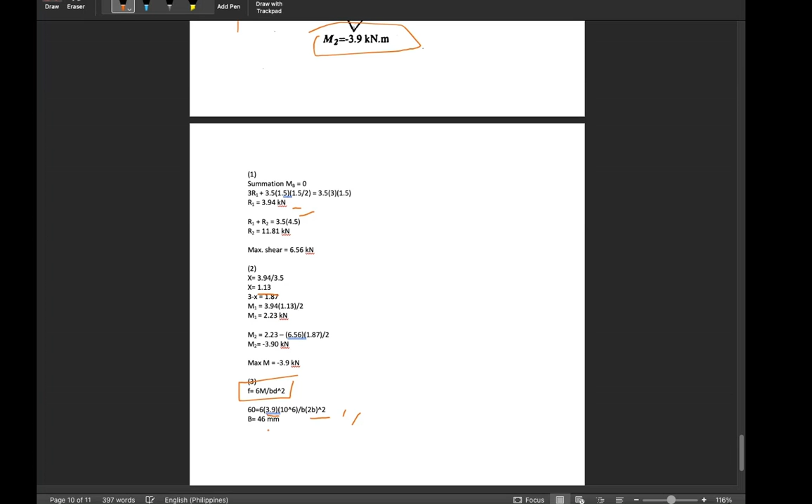So since meron tayong maximum shear moment, using our formula for the bending stress, naalala niyo po ba ito class? Which is sigma is equal to 6M over bd squared for a rectangular shape beam natin. So we have to determine what is our base dimension. So given tayo ng allowable stress na 60 megapascal is equals to 6 times M, ang nakakuha nating maximum moment is 3.9 times 10 raised to 6 over b, and ang d daw natin is twice nung ating base, squared. Then by computation, we could get for our b is equals to 46 millimeter.

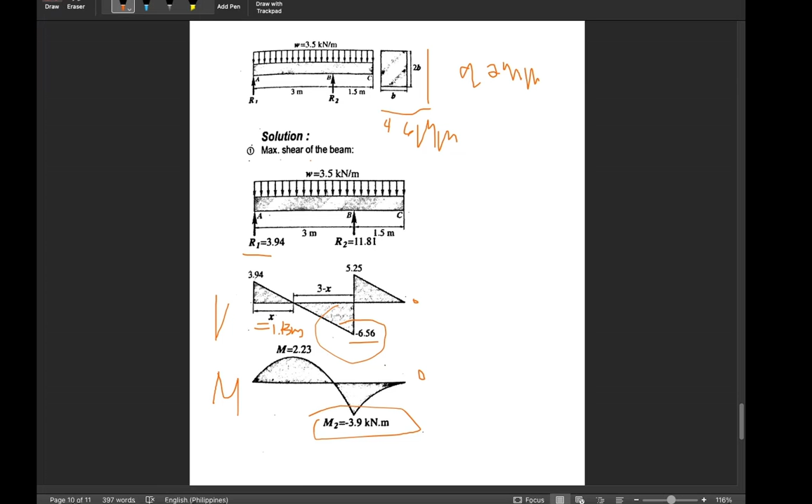So 4.6 millimeters. Hindi, 46 lang pala. So 46, ibig sabihin ang ating depth is 92 millimeters. So any question pa class? I hope na you recall yung mga...